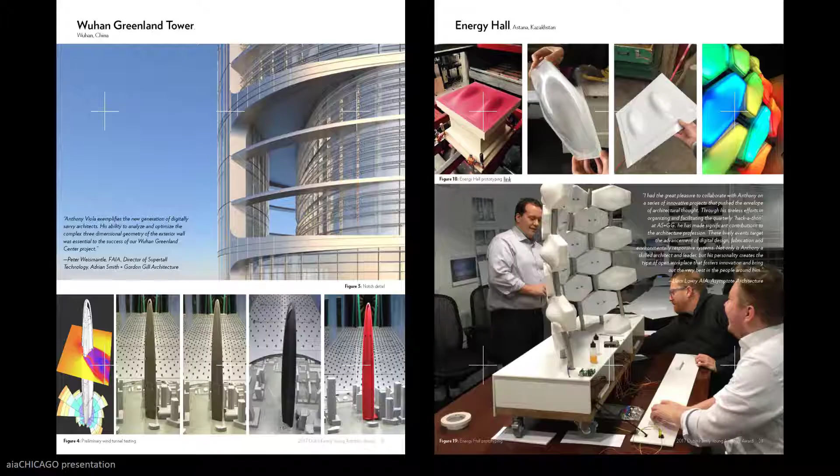And the other good thing is that it forced you to edit and look at the projects you've done, look at the part you've actually contributed and what it means to a total submission. So the most important things I worked on or helped on are the projects we'll look at today, at least for the submission. We'll go back in some fun history that Joan wanted.

So it's a great experience. The other advice I'll give, that I think was important for me to showcase in this submission, was the outside professional activities that I feel very passionate about.

I was the co-coordinator for the Design KC, which was born out of a want to expose other design professionals to the sort of interdisciplinary design teams I was getting exposed to at ASGG. The projects are not necessarily always a singular vision, it's a team of a lot of people, and that was my avenue towards the Design KC. That then grew into a broader group called the Chicago Computation Group, which is about advancing how we engage technology in a broad sense in the design of buildings.

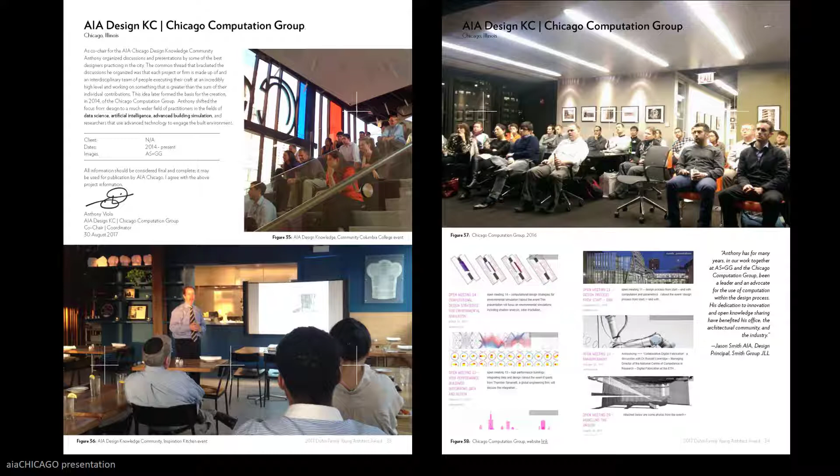I worked right out of school for a small firm called Future Cities Lab, whose work we'll see. Then I relocated back to Chicago and worked at Valerio Dewalt Train for about 2 years, and I've been at Adrian Smith + Gordon Gill Architecture for the past almost 10 years.

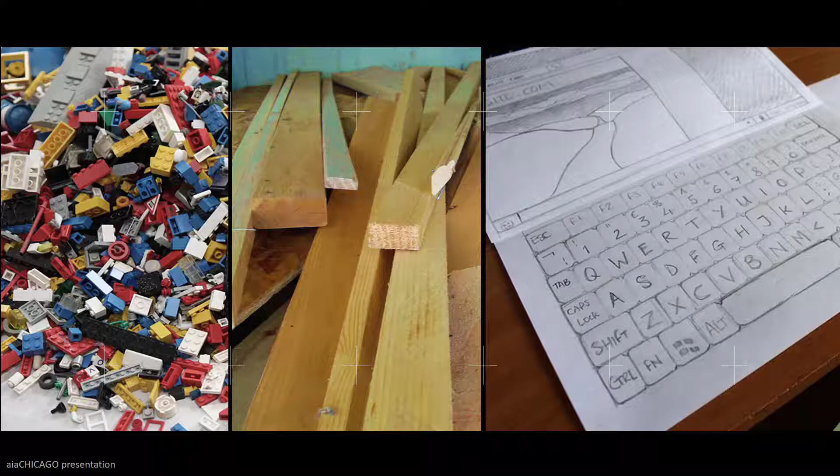Just a little bit about childhood. My parents were both teachers — my dad was a science teacher, my mother was an art teacher — and I think that had a big impact on how I learn and how I teach other people. They also had a lot of patience.

My dad had done handyman jobs during the summer, and he always had an array of scrap wood and scrap materials that were more important than maybe other structured building materials, and it made you kind of ad hoc create the environment.

About where I'm from — Kenosha is an industrial town just north of here, and there's nothing remarkably beautiful about it, maybe except the lake and a couple key things we'll look at. What I found interesting is the way there were a lot of factories in Kenosha, embedded in the community — literally across the street from a factory were houses, not far from where I lived. I think that had a big impact, because it was a piece of social infrastructure that wasn't apparent when I was 10 riding my bike around, but it is apparent now, and you see it.

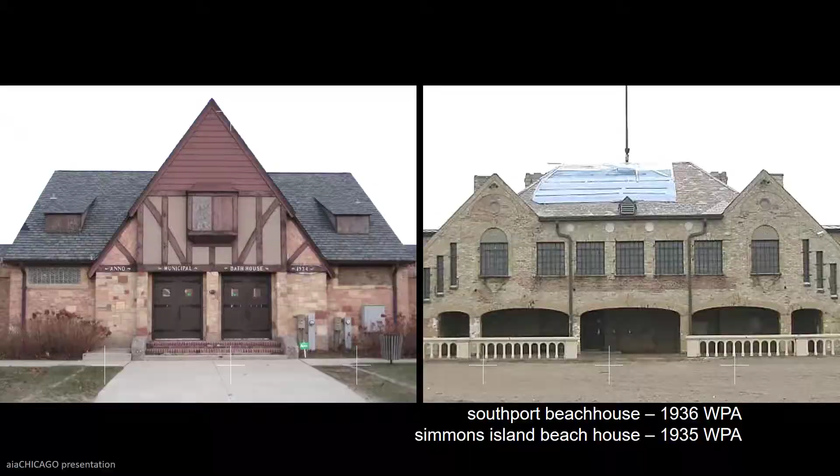Another unique thing about Kenosha, this idea of social infrastructure — this is a pair of beach houses built in Kenosha along the lake during the Depression. These were Works Progress Administration projects that employed architects to demolish existing condemned buildings and rebuild them into public beach houses. It's an interesting parallel, because now they're going through another period where they'll probably get demolished and rebuilt into something else.

Okay, so now we're going to go way back. These are my first studios in undergrad — kind of funny, but it was really good to understand the context of this kind of stuff.

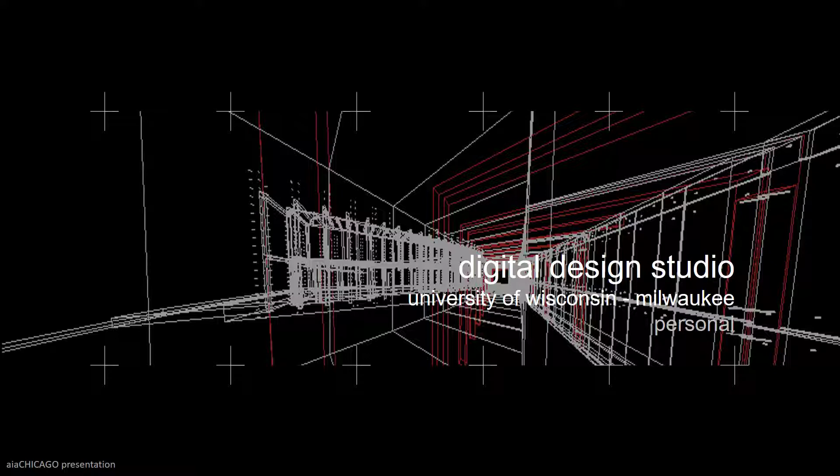This is from 1999, a digital design studio — the first in a series of design studios at UWM that used the computer in a way that wasn't just drafting or a tool. How do you engage with it? What is it going to afford you that other tools won't? This was at a time when there were no other digital design studios — we were taught hand drafting, ink on mylar.

Oh, you can just see this was a library project for Milwaukee. Another project from Milwaukee was with Neil Frankel.

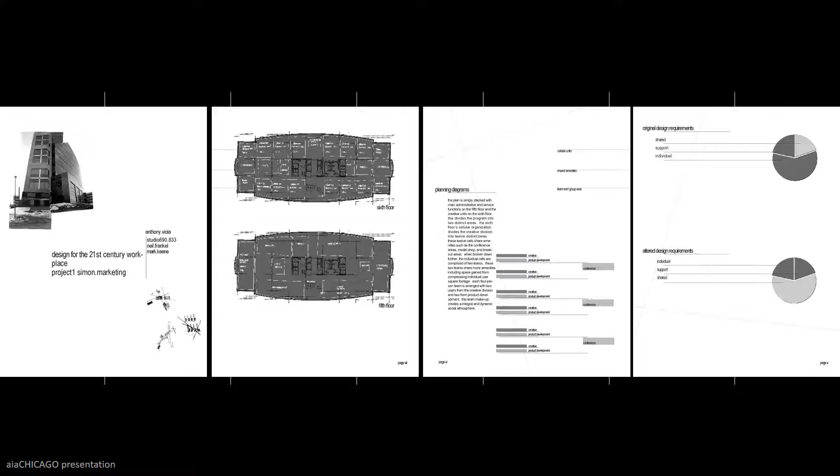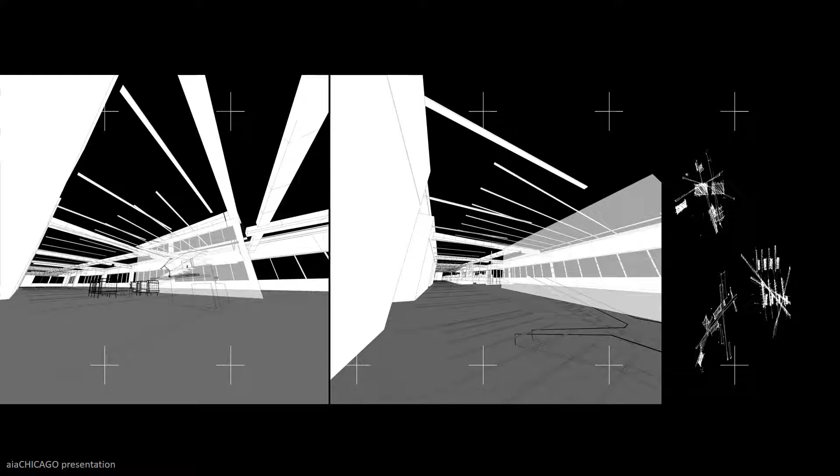It was a design research studio, and the interesting thing was you had to write in a design studio. You had to think and do research and confront issues like how does design impact, in this case, creativity. So it was about evaluating the program, challenging the conditions you're given, and making sure that what you're doing really has meaning beyond the image, the line, or the wall. It really had an impact, and you'll see, as you get further in my career, that makes sense.

So these are just early stuff. And I was always going back and forth between this idea of physical models and the digital. Projects at the University of Virginia.

When I came out of undergrad, I really felt that I would go to an all-digital school like Columbia or SciArc at the time. That's just what I'm going to do. And I applied to University of Virginia and visited, and just kind of felt different about how their attitude about making is different than a purely digital workflow.

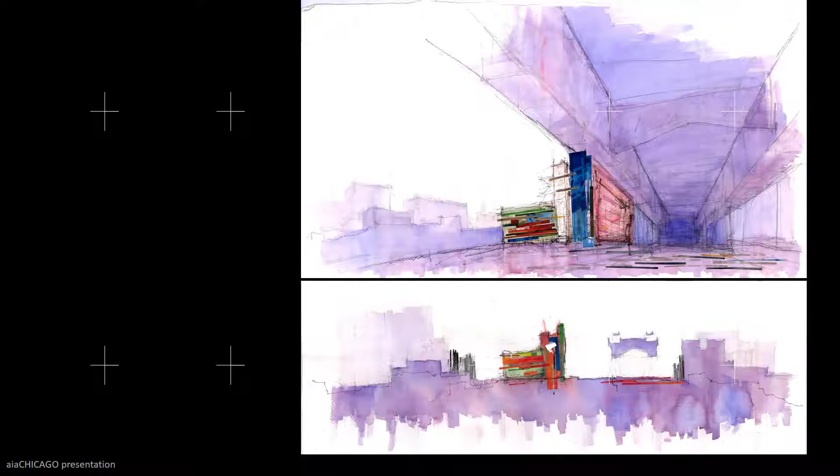It has a more open pedagogy, and you were challenged to make things in different ways than you had before. So these are some watercolors from that project. It was a different way of making and collaging, using that as a medium to design different things. And all the while I was still conscious of using digital tools, just engaging them in a different way. How are they part of the dialogue, and how is that dialogue bigger?

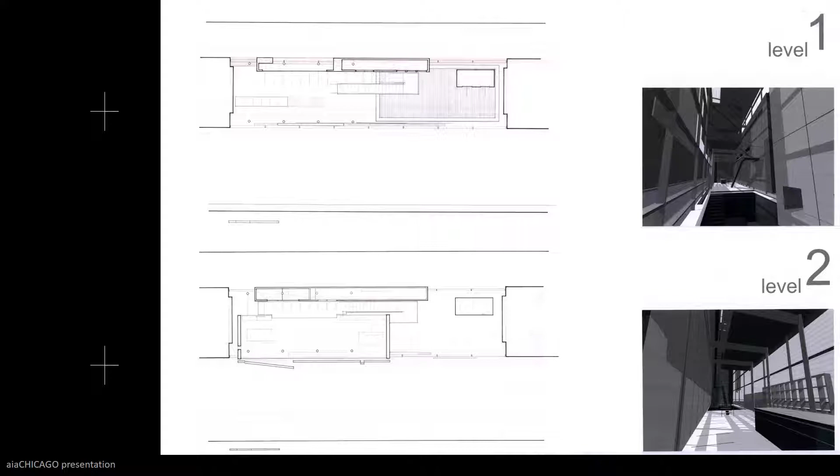This was another project from the University of Virginia, for the New York City 2012 Olympic bid, and this is like the Olympic Village along where basically Manhattan meets the Bronx. It was a much more challenging project because it was a huge swath of land.

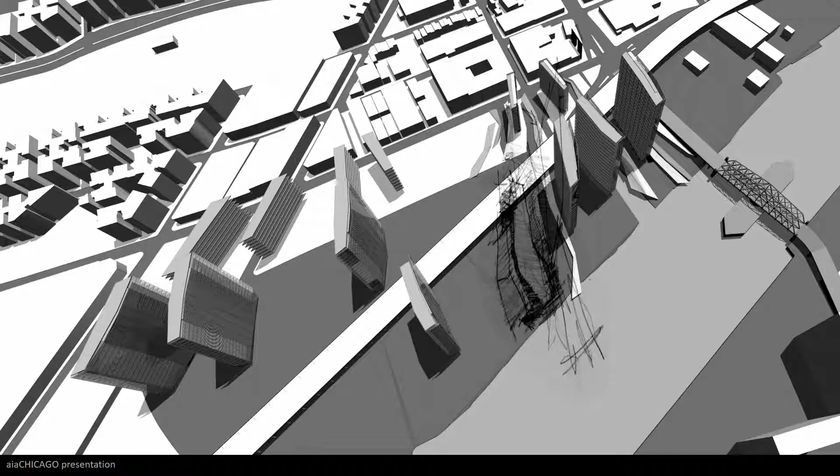Virginia has a very strong landscape program, so this was actually about how you design. Nobody at the school was doing kind of density, like taller buildings, but they were also very concerned about the ground plane. It was the first time I had looked at how buildings frame environments, and how they touch the ground plane is actually really important. So these were studies of how the tower meets the ground, and how the thickened layer of the ground could be exposed or revealed in a way that creates a different spatial experience.

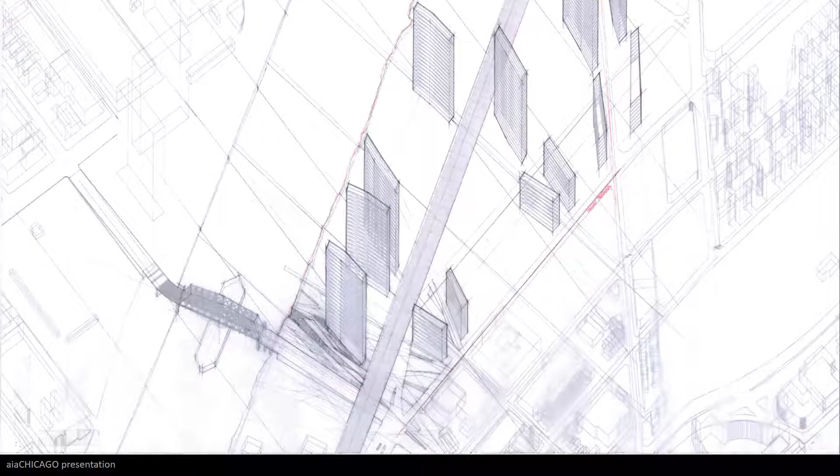These are larger study model collage pieces. At this time I was going back and forth again between the digital underlay and the hand-drawn, trying to understand the expression of that, and how that's helping drive what the project is about. So these are big drawings of that, still always retaining a little bit of the digital.

Okay, the last school project is my design thesis, and it started off with the premise of this idea of social infrastructure. So how do you design spaces that are a collage of different program types, but are actually a piece of social infrastructure that affords connectedness?

I didn't go in there thinking it would end up being at least a portion of an airport. It actually started off with hybridizing different program elements, things like a power plant, a city hall, and an internet switching station, somehow combined. Social pieces like the city hall would be paired with things like the internet backbone, which usually isn't exposed to people in a way that illustrates its physicality. Now an airport is a perfect example of how that comes together in one location.

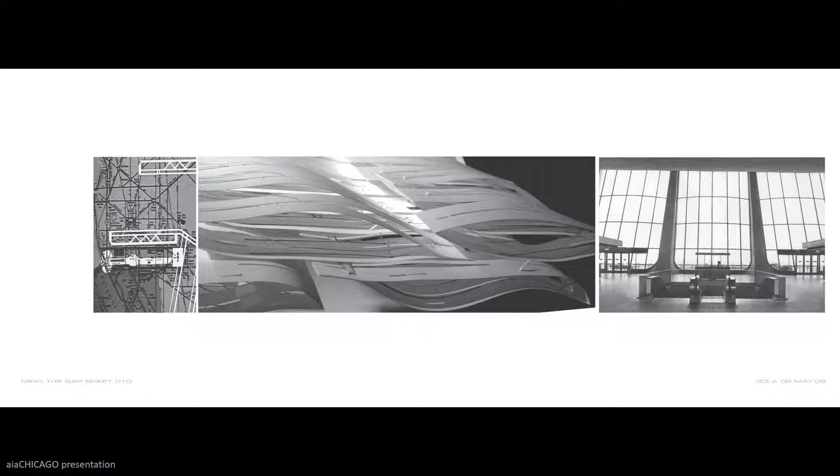You have a piece of social infrastructure like the airport terminal mixed with things that are unseen, like the airspace requirements, and a big piece of physical infrastructure. So that was kind of the jumping off point. I looked at the Saarinen terminal at Dulles, and it ended up going in a lot of different directions and getting really weird. This is just an image about looking at different scales of mobility—how are people's movements mapped, and how is that relevant to someone flying from Dulles to any other location?

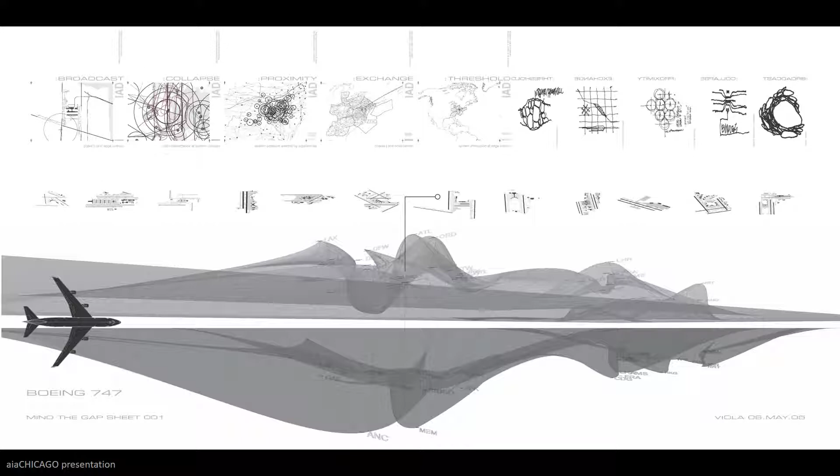And it became more and more like, let's zoom in further and further. What these drawings are looking at is, if I look into an airport and there's the concourse tunnel that takes you from the Saarinen piece to a midfield concourse, that length could accommodate all the airport program. And how does hybridizing that program really start to reveal things?

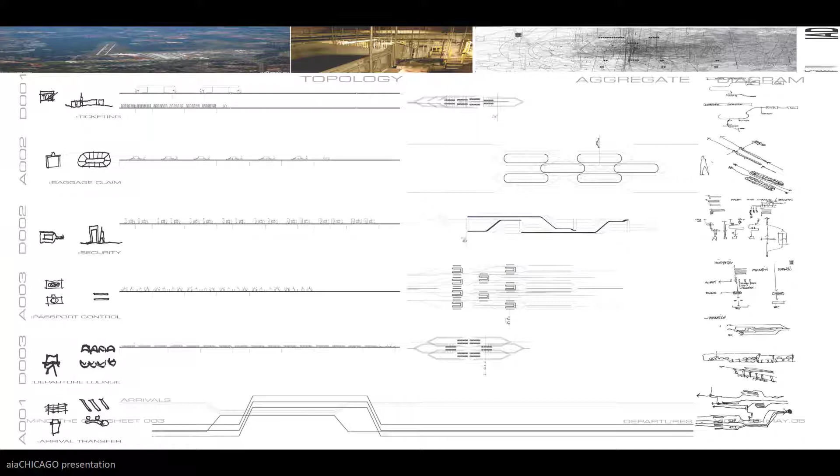So these are just drawings talking about what are the different space implications of the arrival sequence and the departure sequence, and how would being able to go through ticketing and see the customs hall—how are those two pressures put on each other, and how is that revealing an interesting architectural experience?

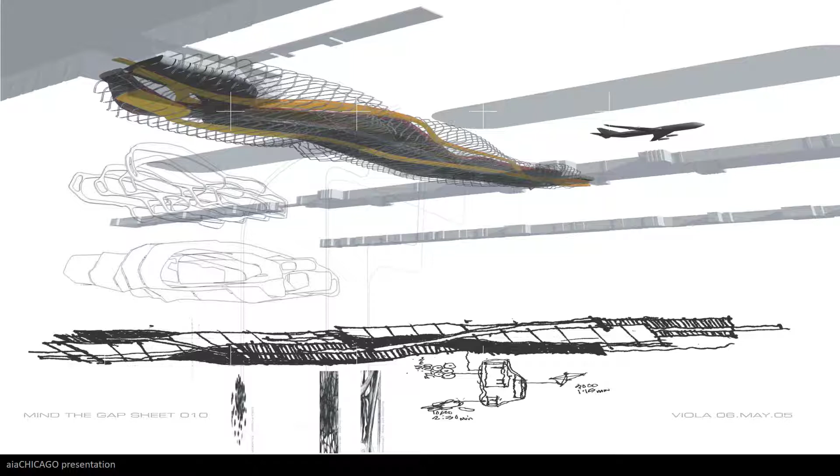So these are just more graphics from it. One of the kind of interesting things that I took from this studio was the start of a parametric design methodology that didn't assume what the end product was going to be.

I didn't know going into it that it was going to look like a weird series of muscles or a slug. I went into it thinking—at the top of the image is the map of all those different spatial conditions, and the way that you bundle them and arrange them are important and spatially relevant. And then it resulted in something.

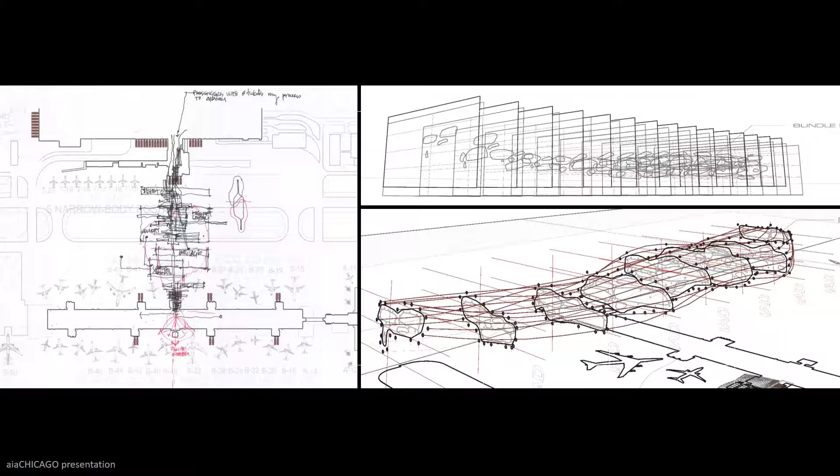So you could move each one of these little blobs around, and the overall form changed. So these are just early studies of how that happens, and really simple things like, again, how are things putting pressure on each other, and how does that push an element out of the way?

How does, when you smash these things against each other, pressure develop, and you start to create some new spaces.

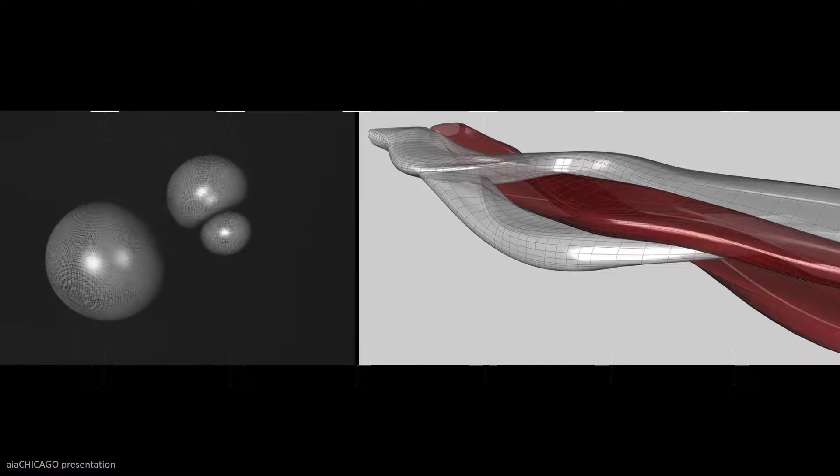And this is actually just a physical manifestation of how can you design a module that is adaptable and that can change, and that through the aggregation of those elements, it can form these tunnels that are burrowed through the earth. So just a quick physical model.

Again, it was a dialogue between the physical—how am I modeling something like bundles of wire, and how is that digitally represented and then physically represented?

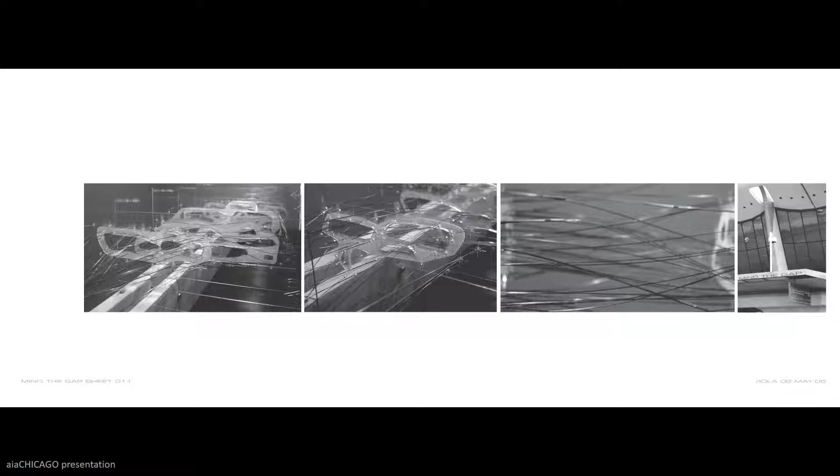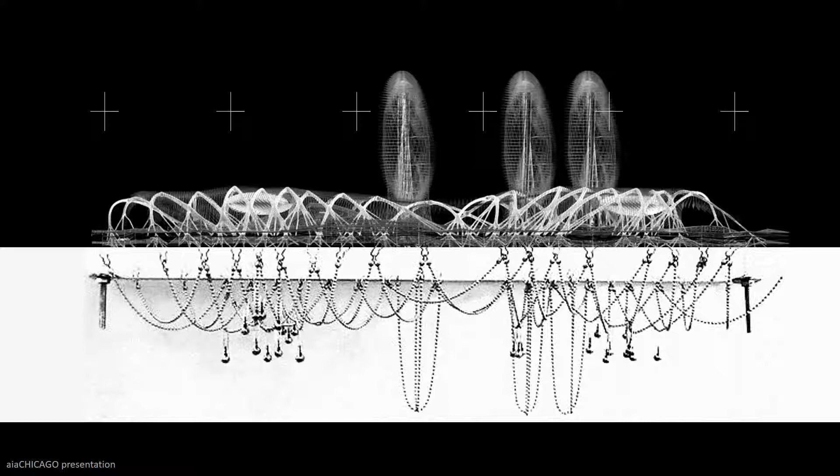So after graduating, I worked for a couple of competitions with a group called Future Cities Lab. This is one from the Performing Arts Center competition in Seoul, and it was really right after thesis, and my thesis advisors were like, 'Listen, we got to do this as a competition, so let's take that same methodology and apply it to somewhat of a real building program.' So this is using digital tools and physical tools to approximate these catenary structures, and then an image of the project on top.

And the project was really starting to look at flows. The site was in the Han River, in the middle of the river flow. There were lots of cars crossing perpendicular, there were people moving around, and how do you pool those flows? How do you allow the buildings to be informed by those flows?

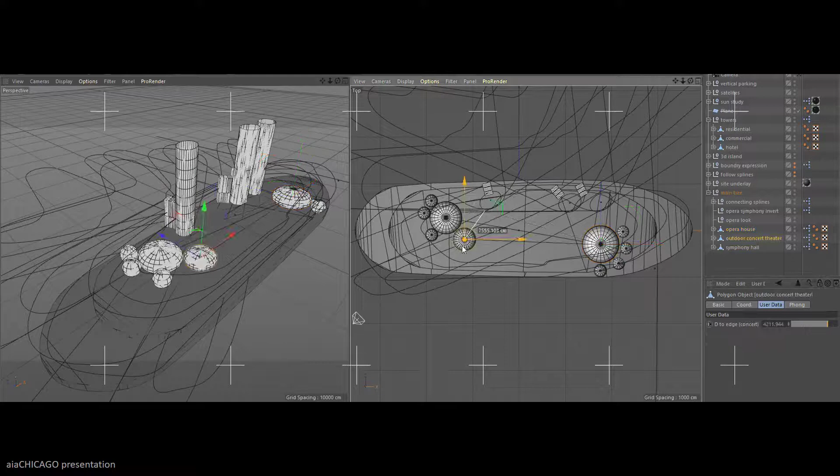This is an early sketch of how you move the tower components. There were residential tower components with their sun shafts, and you were trying to place these elements but not necessarily determine the outcome. The outcome was really a result of the relationships that existed between them, so there was a network that you defined that would be more important than the final arrangement.

This is the final arrangement, and you can see how that makes an impact as the traffic moves through and there's increased flow—things like the structural web has to deform to accommodate that. And these are just some renderings of that, with the performing arts pods hanging from the ceiling.

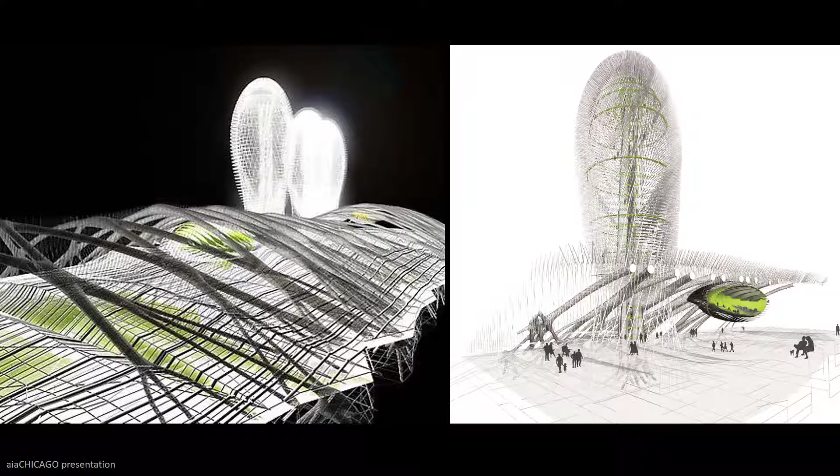And there was a constant going back and forth, marrying digital and physical.

So in 2005, I relocated back to Chicago and started working at Valerio Dewalt Train. It's a really great experience coming right out of school—Joe has a pretty good program of wanting to have young people in the office working directly with him, where you get to engage on the speculative projects and sort of the best projects. So let's look at a couple here.

This project was just one of these week-long speculative exercises, which came up with an idea of what a new aquarium could be for Chicago in 100 years. So I started looking at biological systems and how that might take over for mechanical or technological systems, how we might grow building skins and building forms. This is just some studies in how nature does that.

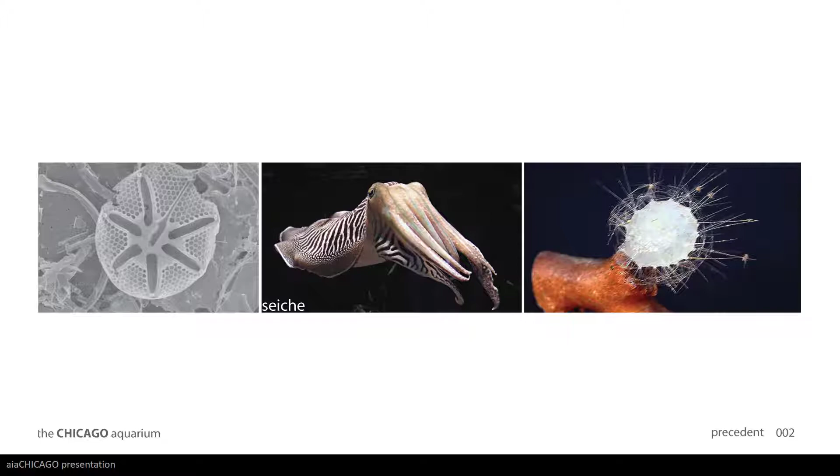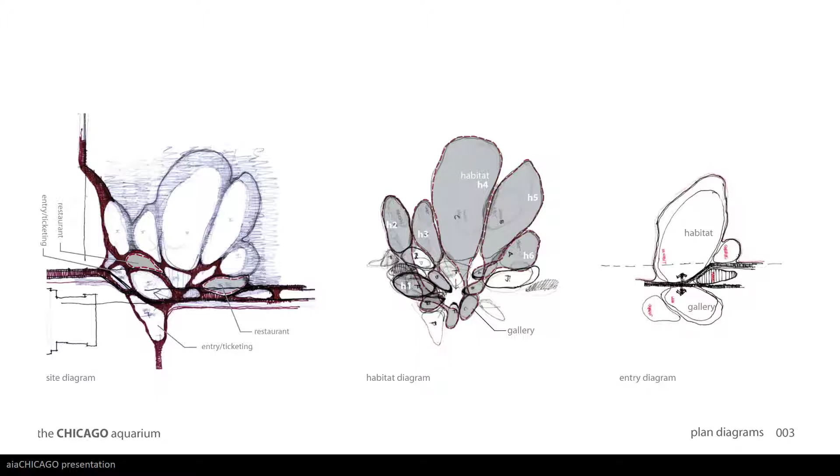And then locating a new aquarium, basically getting rid of the old Shedd building and looking at how the building can filter the water of Lake Michigan, how the experience of moving through the galleries and the habitats, which have very different space requirements, how those relationships actually are important and put pressure on each other. Similarly, how are the building elements in the skin harvesting energy and creating inhabitable envelopes. Just kind of fun views of that.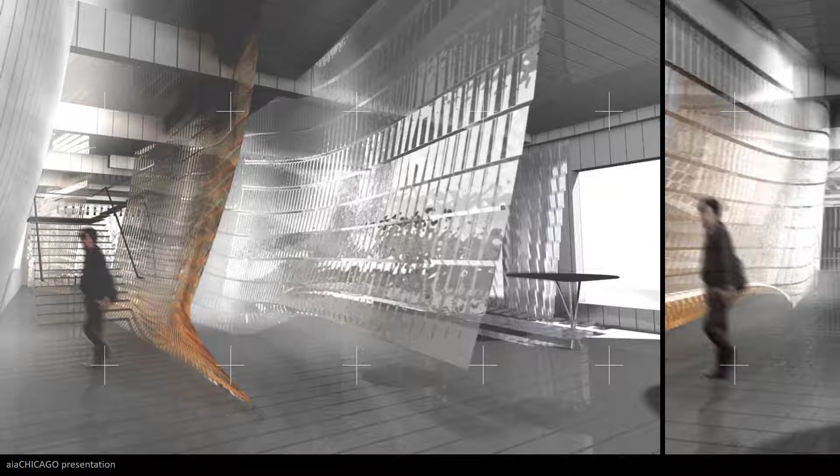So we very quickly iterated through a bunch of different options. This is one of the early sketches for the concept of the project, the idea of this smooth wall meeting a more refined aluminum wall. It ended up being this sort of wrapper that encloses the store, with three-dimensional profiles that are very beautifully formed out of wood.

Again, using these tools to go back and forth. This is the 3D model view of it. But any one of these points you can pull in and out, and it changes the global representation.

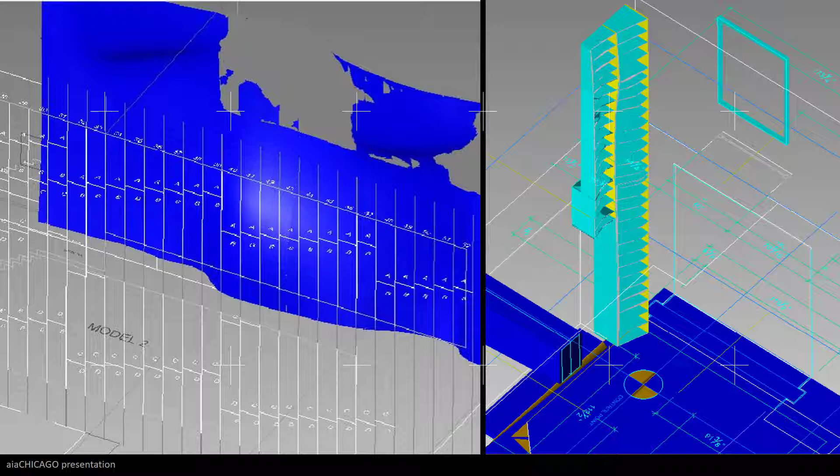That was important because in coordinating with the fabricators at Imperial Woodworking, they were very conscious of the limitations of the machine, the clearances and tolerances it could deal with, and how the guys were actually going to build it. So very quickly we could make modifications to our model and have them take that, modify it for their requirements, and get that back so we could overlay it and understand the implications. That drove further development and refinement in our model. This was the first time I had been exposed to that digital fabrication workflow.

These are some guys in the shop actually putting it together. It's kind of interesting when you've done digital work, or even non-digital work, but not built. And then this is the result of those lines meeting the paper, or the mouse hitting the click. This is also the first project that I worked on that is now closed and converted into something else.

Okay, so now you guys are all from ASGG, so you've seen a lot of this work before. But just to make the connection to current work, this is some of the work that's now part of the submission.

The Federation of Korean Industries is a project that we started in about 2009 in Seoul, Korea, and it's actually, weirdly enough, right inland from the earlier project that I showed from Future Cities Lab. So it was kind of coming around. It's a 50-story building, and the portion that I worked on is this 3-story conference center.

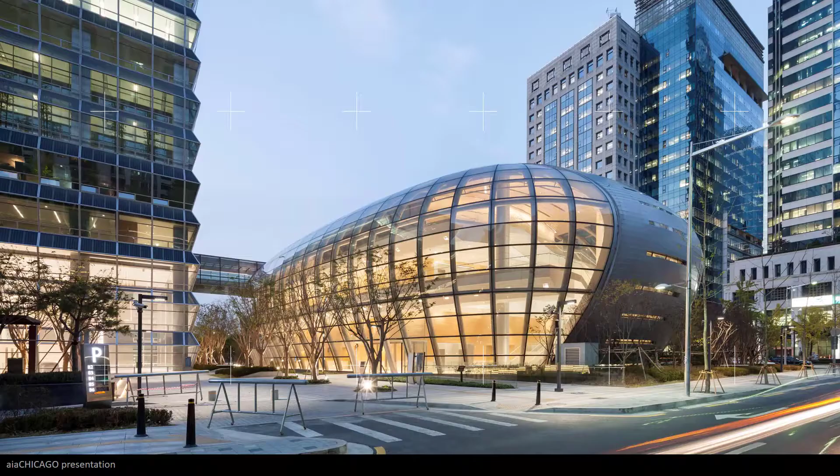The conference center is clad in this double curved glass facade, and the actual enclosed conference elements, which are opaque by their nature, are set off within this shell. There was a challenge because obviously, if it's a double curved glass facade, every formed panel is different, and that has a huge cost.

And so early on in the process, we looked right away at all of the panels being double curved and every one of them unique. Then at the opposite end of the spectrum, every panel is flat. I think you can see there was a dialogue or negotiation that had to happen to end somewhere in the middle, approximating the design surface in a better way. This was in collaboration with, at first we were doing this all independently and discussing it with the client.

And then eventually the fabrication team got on board and they produced this model in the middle, which is a mix of unique panels and non-unique panels. This is just some shots during construction. You can see it was with Fulcra, the fabricator, working with Cricursa, the glass vendor. They're out of Spain. It's a beautiful little jewel project that really got to flex the skill of starting to input some of these parameters within the model, so as you're designing, it's giving you that feedback in a live way.

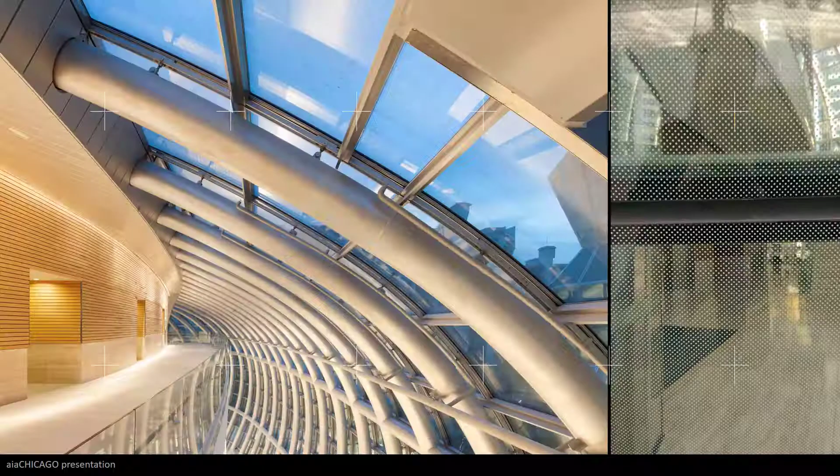It's just over 600 meters, and it was the first real chance that I had at working at ASGG to work on a high-rise project that wasn't just a competition. It was now, we're doing this project and the rubber is meeting the road, and we're really going to have to execute. So that same pace of during the competition, doing all these design iterations, all of a sudden went into the creation of the building.

It also was sort of my first look at how the structure of the building and how the architecture of the building has a real impact on the performance of the building, not just in how much energy is it generating and how much energy is it conserving. In this case, we made a lot of architectural moves, like tapering the building, rounding the top, softening the corners, and punching holes in it to reduce the structural loads on the building.

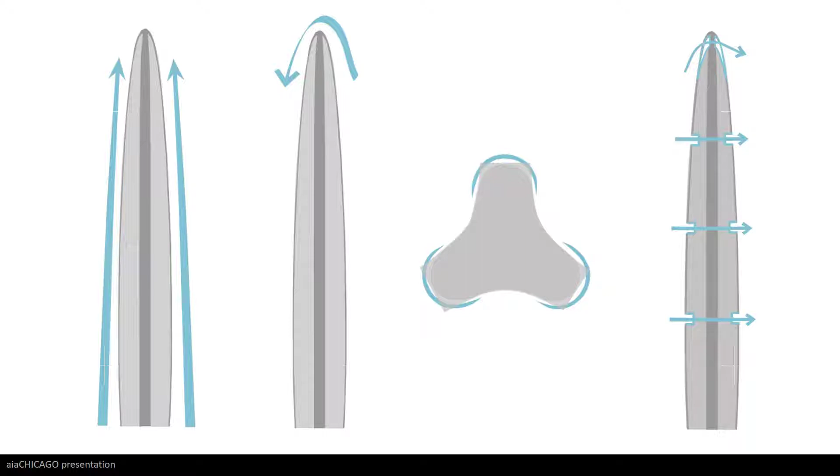And those were tested with RWDI as physical wind tunnel tests, and we went through many iterations of that to understand what the impact is of the architectural moves on the structural system. That has a huge impact on the embodied energy in the building. And if you can save 10 to 15% of the steel tonnage on a building of this scale, that has a much bigger impact in terms of the efficiency of the material use.

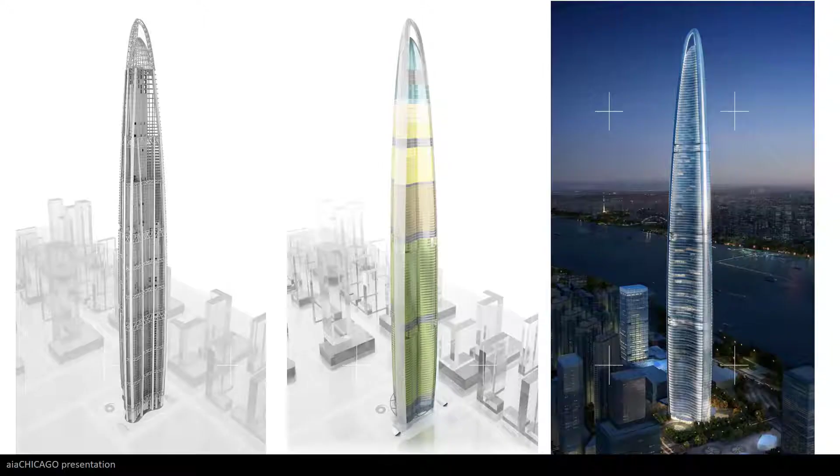So you can see these are just some diagrams of, it was very important that all the while we were very conscious of how the structural system was married to the architecture and how that was impacting the overall profile of the building. The program constantly kind of changed through schematic design, so it was kind of fun to keep that in order, and again all the while creating a very iconic building.

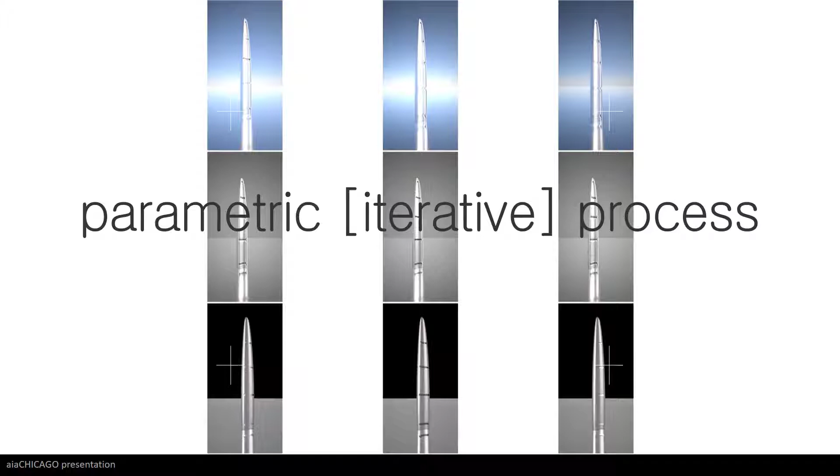And so we went through, this is early in schematic design, we went through a huge amount of design options just to, for all different reasons, program. And it was aided by the fact that we were using sort of a parametric workflow.

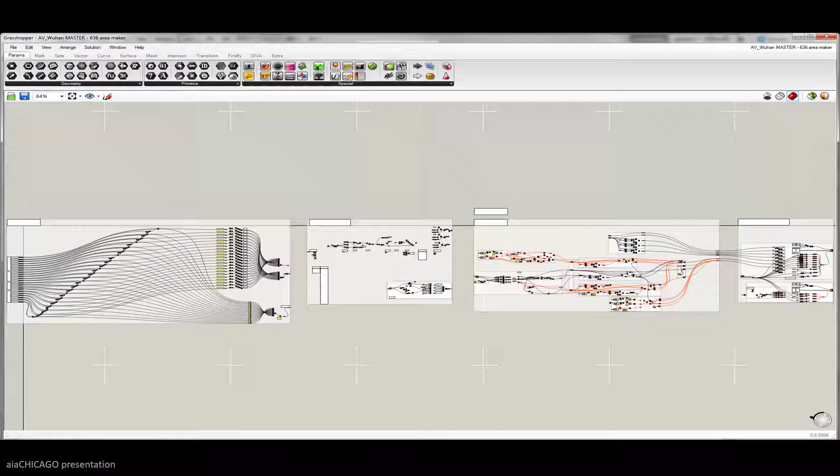So this is an early network map of the various forces that are at play. You can see things like the program, or in this case, we're starting to look at how there's the different panelization. So that script was actually our digital model maker. We could understand what the program was, and we could understand at a very refined level, in this case fabrication, all at the same time.

So every move that you were making to accommodate a different program from the client or a different requirement from the structural engineer, that had a different iteration, and you needed to respond with visual information. So the partners want to look at what does it do to, how does it change the profile if I move these notches in and out, or up and down, very quickly be able to turn that around. Understanding how the different analysis performance is doing.

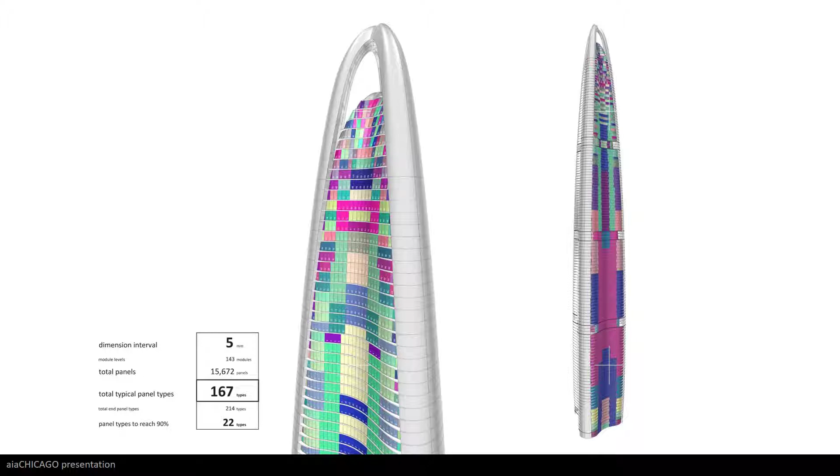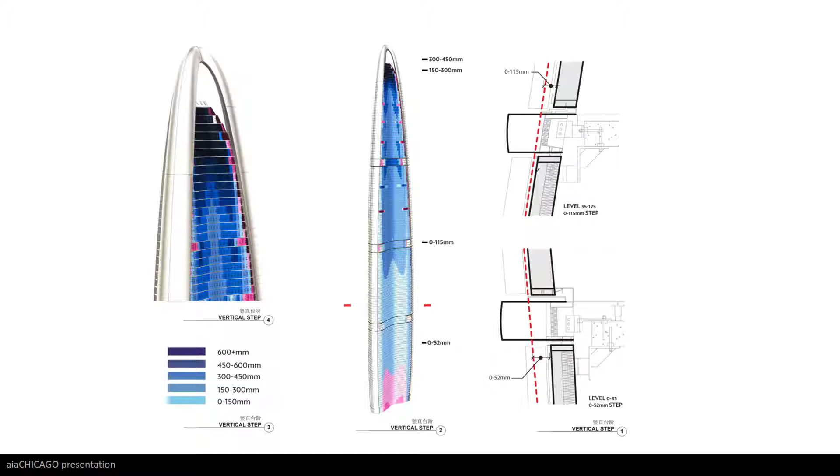You were understanding the curtain wall detailing, and trying to understand these big global moves and how we were able to accommodate it. In the end, this is what you're kind of going for. You could have any one of those steps say this is not our process, and I think you would end up with a much different building. At that time, there were sort of disparate people within the office that had the skills and tool set to do this.

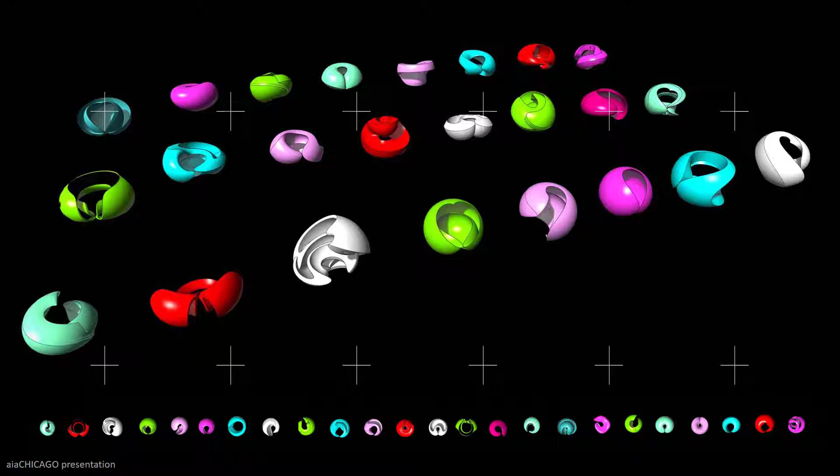This is just some wearable technology, and people who would normally not work on this were working on architecture every day. How would you design a wearable object, and what would be the responsiveness? It lit up in a way that was responding to how you were moving.

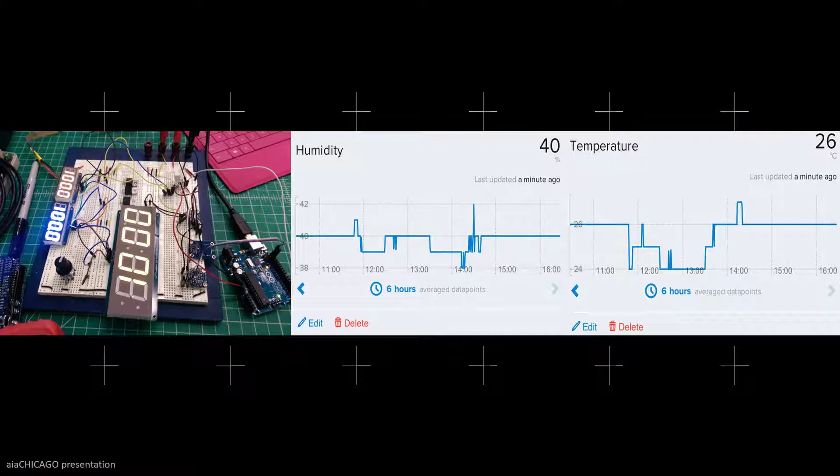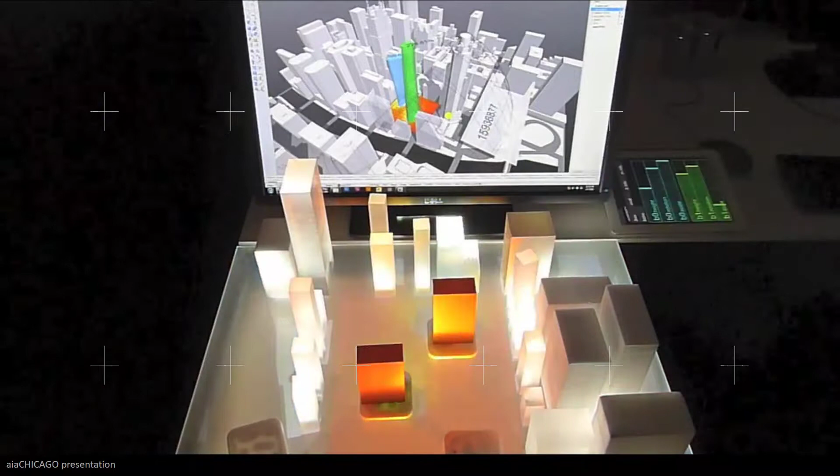We ended up with a proof of concept of a way of digitizing the physical model. We were taking a physical model and putting it in digital space and being able to reveal things in digital space that you couldn't get from the physical environment. I can understand relationships and scale with the physical model, but I maybe can't overlay what the effect of the radiation analysis is.

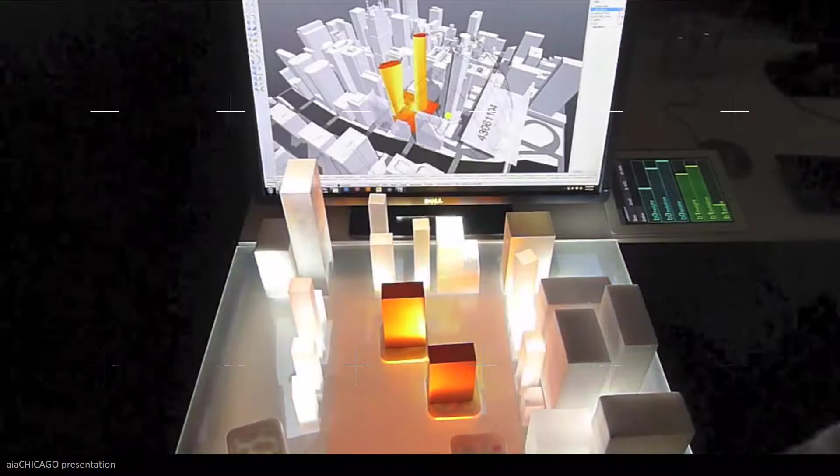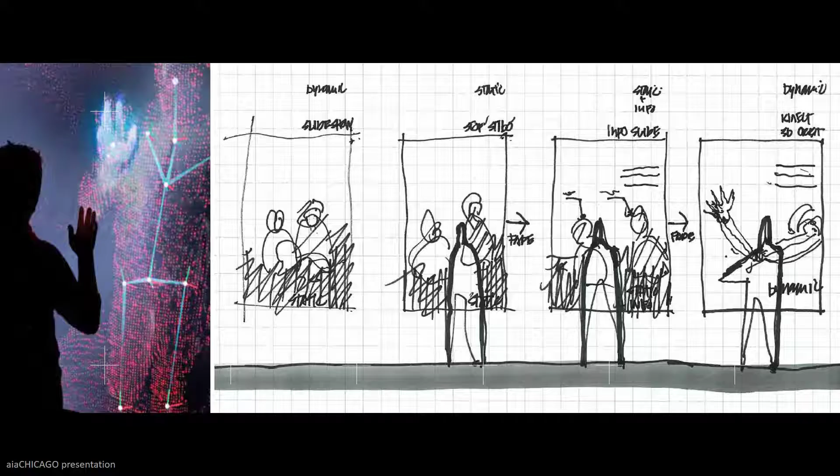And that manifests itself in a temporary exhibit in the space, which is on Washington and LaSalle. This is the second project that's no longer there. So anyways, we were starting to look at ideas of how you were able to interact with the exhibit. And the fact that it's an all-digital exhibit gives you the chance to really interact with it in a way that you're not accustomed to.

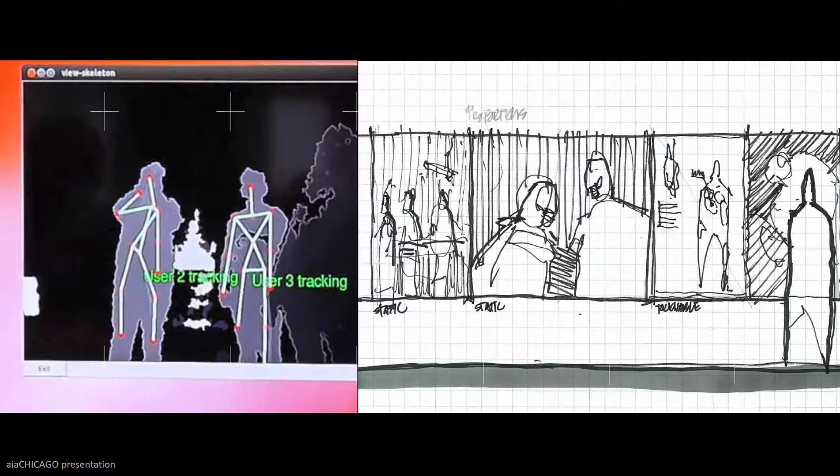So these are Kinect sensors that are actually tracking individual users as they're walking around the space. You could start the exhibit anywhere, and it's tracking you, revealing more information to you the longer you linger within the space, or it can recognize gestures. The space is just a simple ring of those digital displays. The interesting code discussions were about what happens when two people are next to each other. Does the exhibit change as there's more people within the space? It was kind of fun.

The Expo 2017 project is for a World Expo in Astana, Kazakhstan. This is the launch video from when we started, and it's probably one of the best videos of the project.

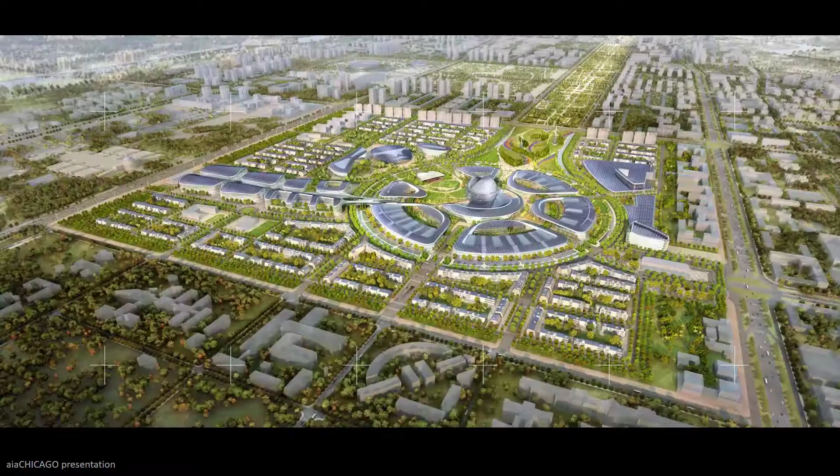The project was a competition to develop the World Expo on this greenfield site, about 175 hectares, almost the scale of the Loop. Imagine doing this back in 2013, four years before it was supposed to be built. This was fast track at a much grander scale.

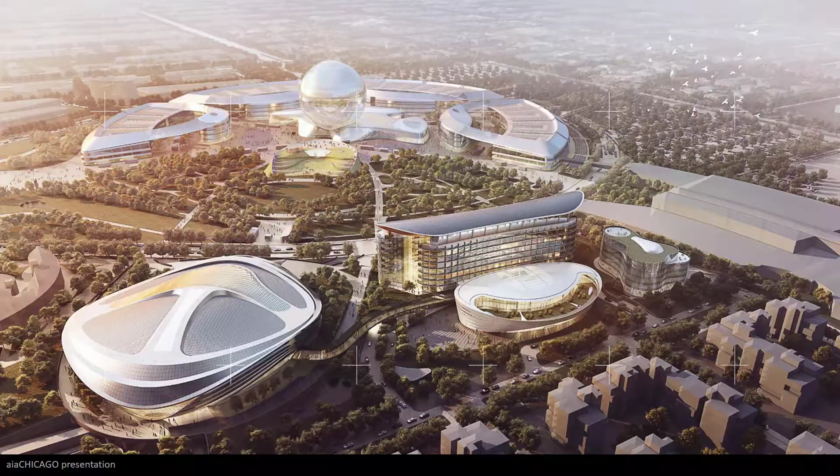The inner circle is the Expo portion, and it started and has ended. It ran through the summer of 2017.

Again, this was an opportunity to really showcase how we need to develop digital workflows to allow us to work at that pace. You were going from sketch to construction in a very short period of time, and that required you to figure out how you were going to do it.

All the while, we had very aspirational goals for performance. The title of the Expo was Future Energy, and they were really committed to this idea.

Early on in the project, we were doing big studies about how the whole site should be oriented and how the roof surfaces should be changed, to do the best we can in terms of making it passive—basically grab as much as we can in this first 30%, bring down the energy usage by making the buildings more efficient, and then do as much as we can with on-site renewables.

But even with that, you can see it's only a third of what we could potentially save.

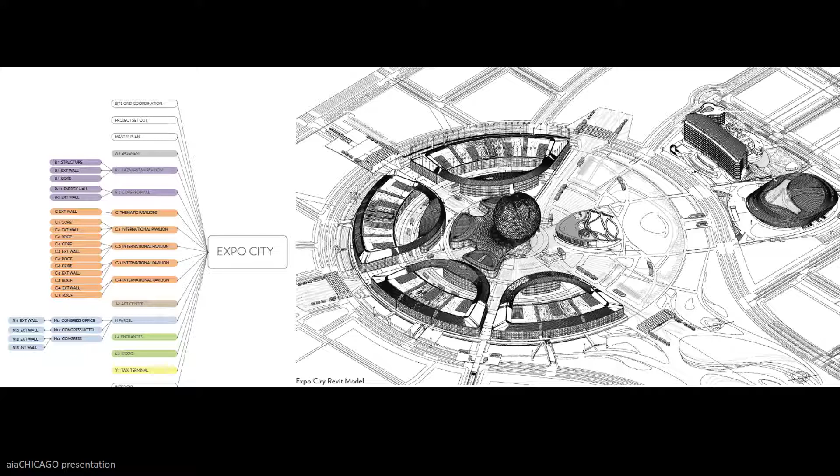We were doing this using Rhino and Revit, and we worked on developing tools for interoperability in a way that let us be designing and sketching almost until we were issuing documents, which was on a monthly rotation. It was a team of 60-plus people in our office plus a team of international consultants, all working in that same model.

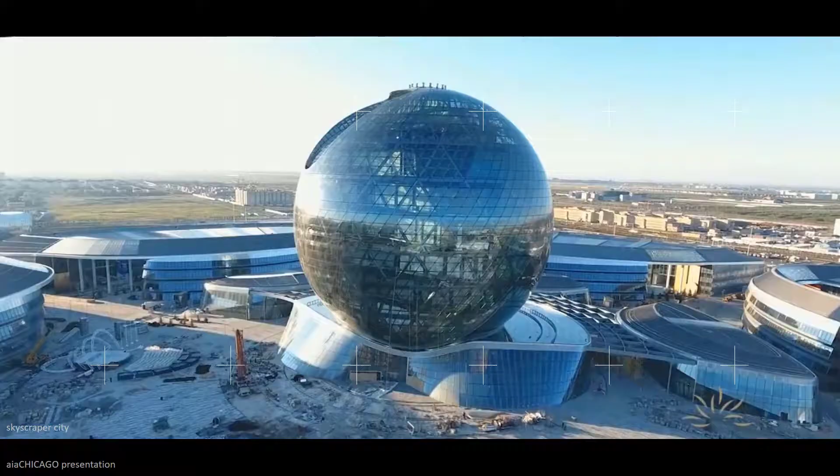The part I'm going to focus on is the sphere and its associated ring. The sphere was sort of dictated—it's an 80-meter diameter sphere, and the president of Kazakhstan really wanted an iconic structure. During the competition, it was different.

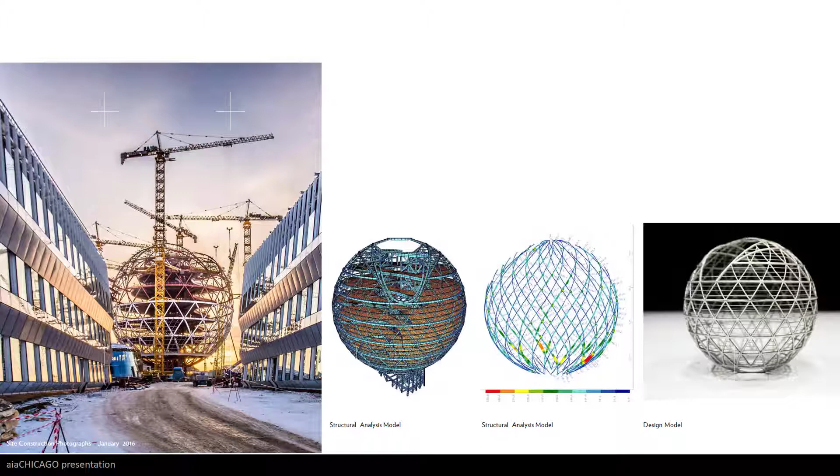The sphere was deformed to respond to the solar conditions. But in the end we worked with the sphere itself, which affords a really unique structural opportunity: it's basically supported by the exoskeleton, or exterior structure, which rests on two piers forming the core of the building. That's very aspirational for a country that doesn't normally build with that technology.

You can see those two piers right here, but there are no columns on any of the floors. Building an 80-meter diameter sphere encloses a lot of area, so while the program area for the exhibit space wasn't that large, it gave us the opportunity to create this pair of atriums that I'll talk about more.

You basically carve away the floor area to reduce the program area, and by twisting and morphing that floor plate—for example, on the atrium facing south, terracing it towards the sun—it really creates a unique space.

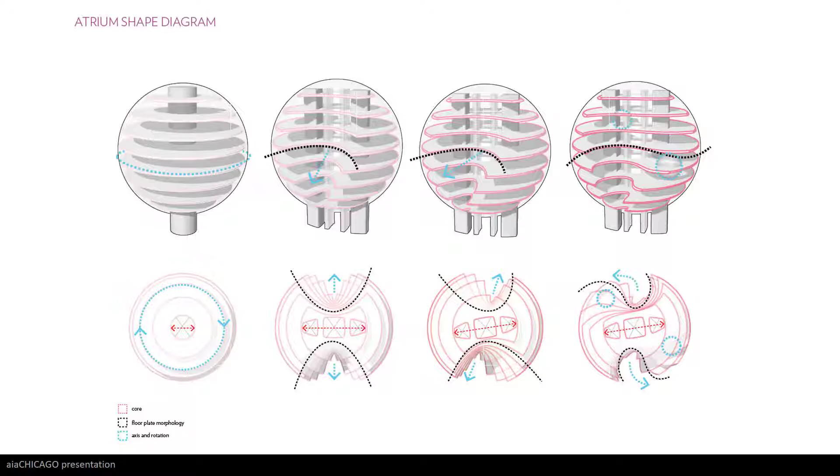Do you want to harvest wind at the edges, or harvest it in the middle? We went through all these different iterations with RWDI, and they ran a series of tests. We learned a lot about how wind moves around buildings from this exercise.

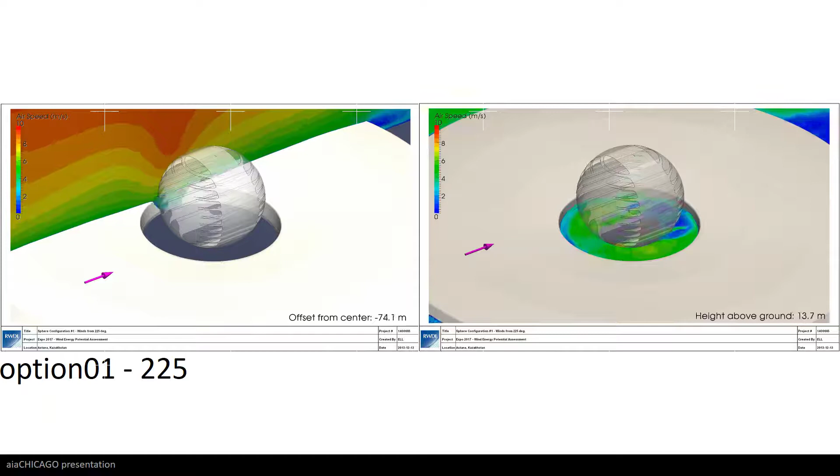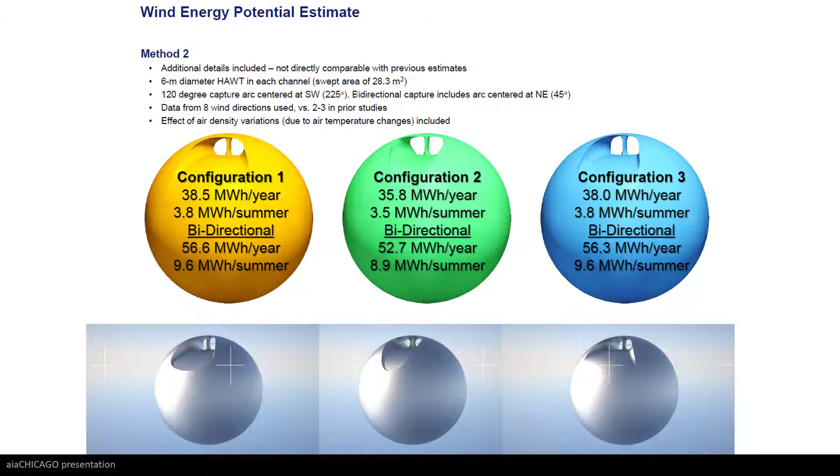It was interesting, but the lesson learned is that for the more aggressive turbines, they can absolutely recover more energy, but you're introducing much more surface area to the outside of the building. So the thought was just to put a larger pair at the very top of the building and shape those as best you can. Wind speeds, as they indicate, were upwards of 150% of what the normal wind speed would be, so the building was doing its job.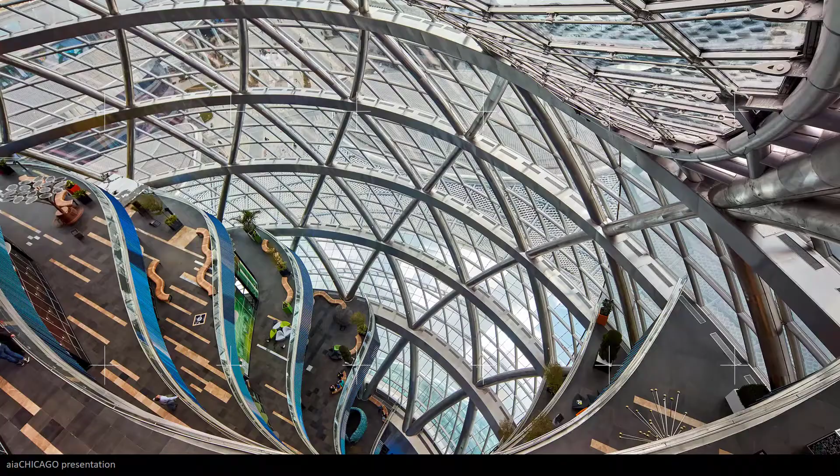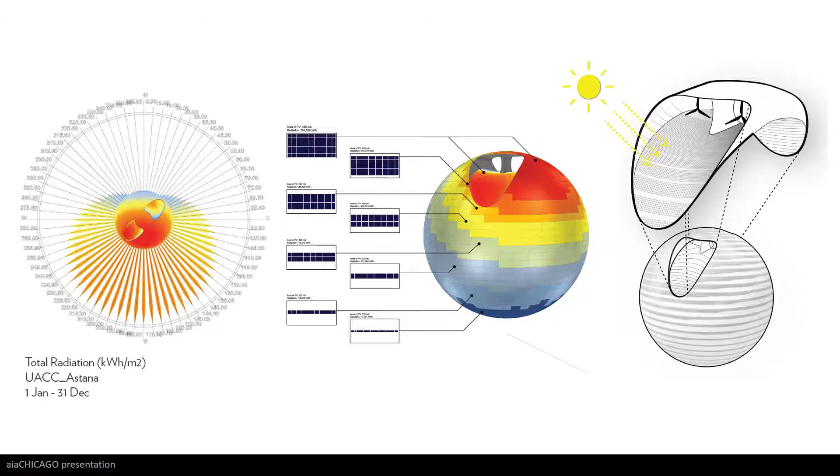The other kind of unique feature is that you're designing an all-glass sphere in an environment that has a huge temperature swing, even more so than Chicago. It can get down to minus 51 Celsius here, so it can get very cold, but the effect of the sun warming that space was cause enough for us to do a lot of investigation in terms of how the glass is selected, how we're doing fritting, and in the original inception was to try to harvest as much energy as you could from the surface of the sphere.

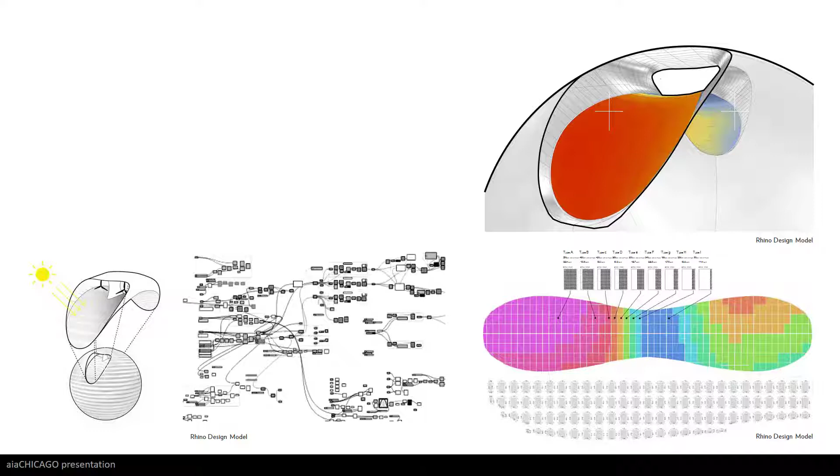All of that kind of went into an evaluation of what you were doing overall. So again, for all those different wind-shaped buildings, how much wind energy were you generating, how much solar energy were you generating, but also how much more exterior envelope are you going to have to heat or cool. Those all kind of weigh into those choices.

And again, this is not because you want it to look like this. It's because you don't want to presuppose the outcome.

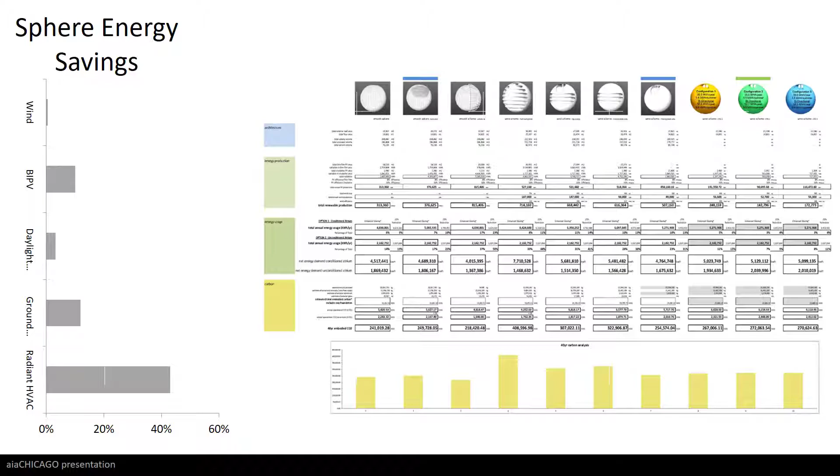So this is the built form of it, and this was born out of one of these hackathon projects. We knew that we had to design something very unique, but it could have been sort of a plain wall similar to the FKI project. So how do you make it more engaging?

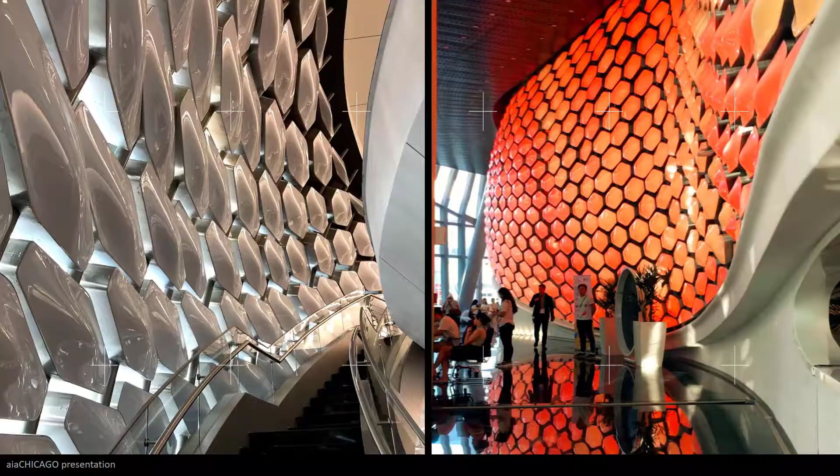So we just, over a weekend, shredded out a couple of ideas about how maybe the wall moves a little bit, or maybe there's embedded LEDs. And in another hackathon we went through the fabrication of some of these elements—things we didn't do before. We'd never vacuum-formed cellular pieces like this and embedded them with LEDs, and none of these people knew how to solder or code to do it. We created a mock-up in the office that really was compelling enough for them to build the real thing. And it's really amazing that that was a fruit of this process.

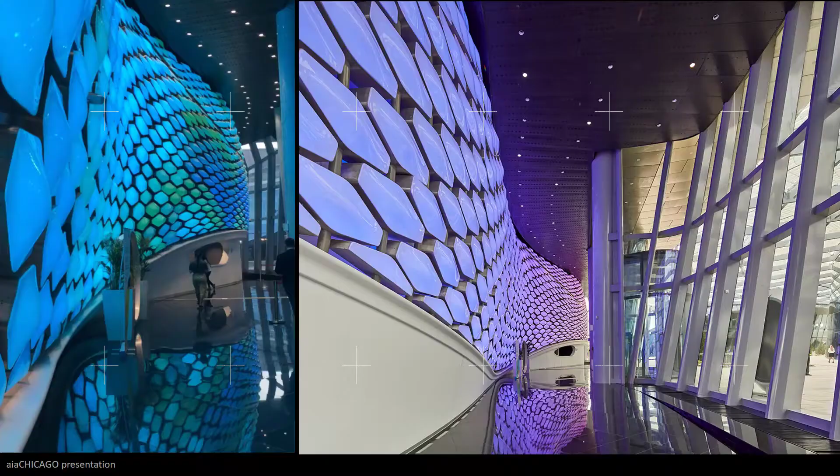Okay, last project, I promise. This is a project for the Mobility Pavilion for the Dubai Expo in 2020, and this is a project that really kind of ties some of these ideas together. It really was a strong team of people who were sort of embedded with that process.

The theme of this particular pavilion was mobility, and an image that we kept coming back to was these Bedouin tents from indigenous people in Dubai. But ideas of how rapidly this could be deployed, or how this is much more tuned to the environment because it can open up a side when the prevailing winds are right—it's shaped in a way that allows for the heat to move through the building. It's a very compact form, and these themes were really impactful on what the project was going to be.

And then from an aspirational level, we were trying to understand what mobility meant, right? Did that mean mobility? What you might initially think is that because it's portable, that means mobility. But it was actually portable because they were trading. So all of a sudden you're talking about social mobility, or kind of a different layer of unseen factors that we really wanted to embed into the project.

So we looked at how different scales of mobility, and we thought the other thing we were trying to understand was how quickly could this be built, in a way that allowed for a long span structure to be built on site during the winter months when it's a habitable construction environment, and that allowed the workers to then populate the rest of the pavilion elements underneath.

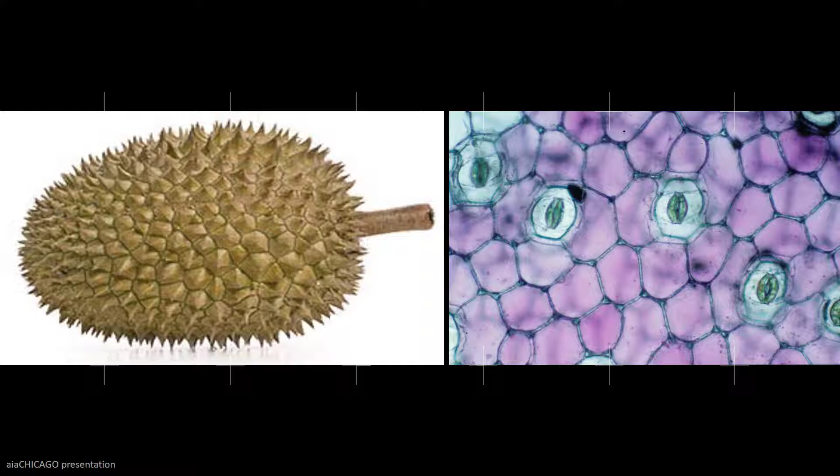I'm really interested in this idea of how natural systems do this, how they change their surface area to regulate things like temperature and humidity in the project. So we did these early sketch models.

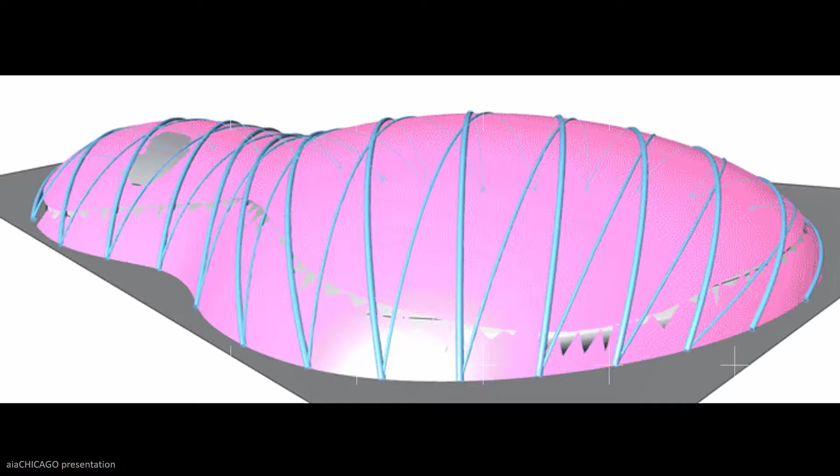And of course, developing digital ways of representing and showing that, in a live model, so you can actually start to alter the program elements, or in this case the entry of the building, moving that around for various reasons. And I want to understand what the manifest form of that is.

And how that could also change the shape of the skin, and how those investigations were really about changing the surface area of the skin to have the building naturally ventilate itself, and how you can generate energy on it.

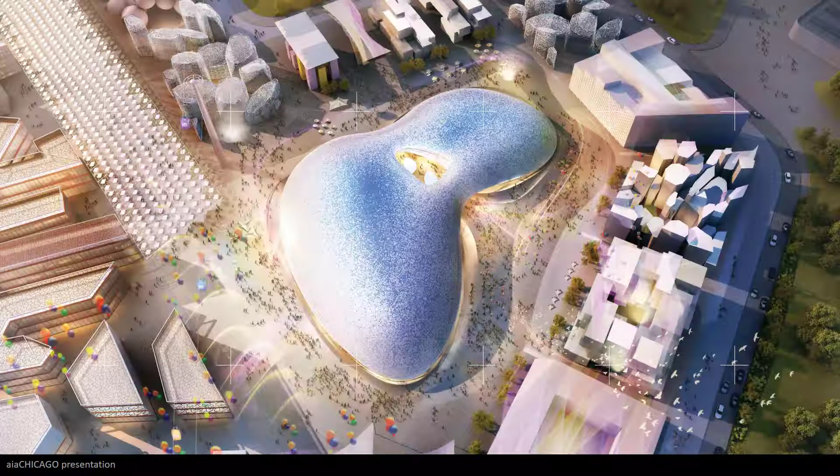So this is the final submission. It ended up being a completely opaque, thin shell concrete structure, which gave you thermal mass, and it allowed you to populate it with photovoltaics so that you could generate energy off the top of the surface.

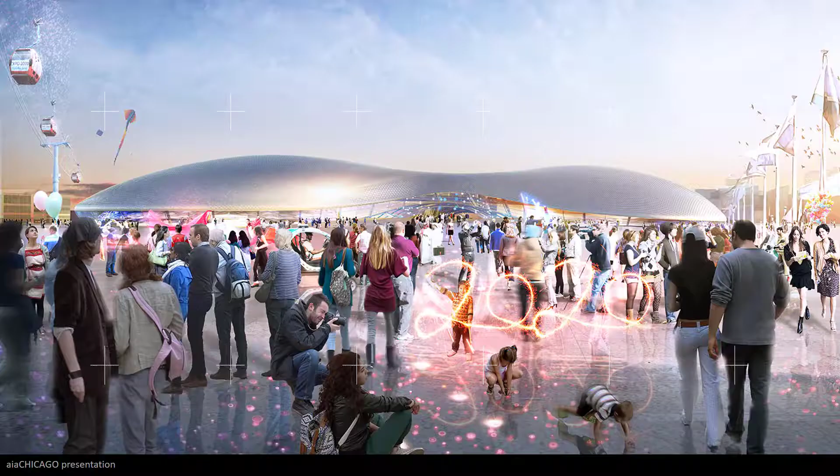You can see those photovoltaics here. Then light is let in through the bottom, similar to the Bedouin tent. It created these really great interior courtyard spaces that allowed airflow to move up and through, and light into the interior spaces where people were moving around.

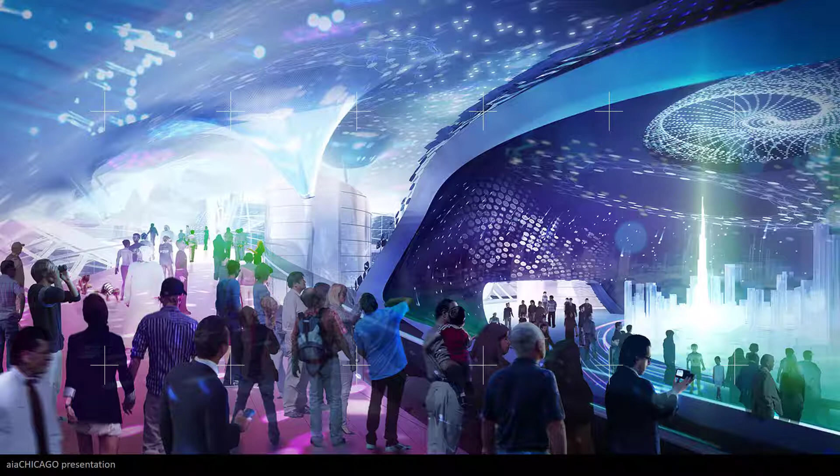A fun thing about these ideas we were looking at on the exterior - we started to look at them on the interior too. So imagine the ceiling being like a fabric surface that is somehow actuated or responsive to people moving around. So for this group of people, the shape of the space could change in response to you moving through it.

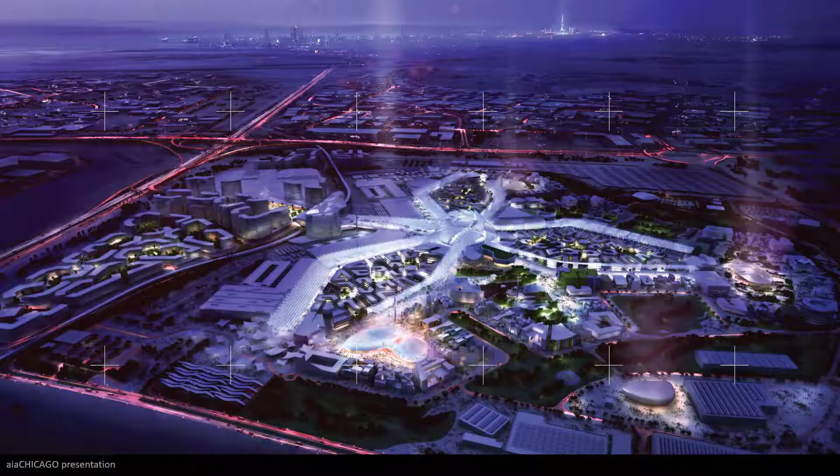So with that, if you guys have any questions or want me to talk more about anything?

Actually, that was the hardest thing of this presentation. I think the work of the award submission was very easy to put together - it was already there, and we've talked about these projects at length within our office. But the first part of understanding, well, how did you get to this point, that was a much longer road for me.